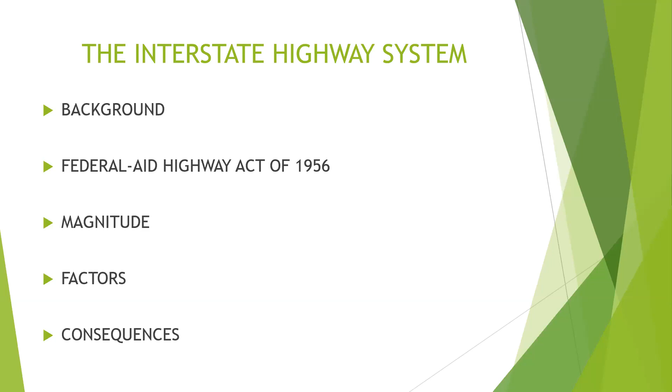Given the explosive demand for automobiles in suburban housing after the war and concern about national security, President Dwight Eisenhower recognized the need for higher volume transportation options. So his administration formulated and implemented the Federal Aid Highway Act of 1956. This was the largest public works program in US history, authorizing construction of 41,000 miles of interstate highways spanning the nation, with $25 billion authorized to cover 90% of the cost. States and local organizations only needed to contribute 10%.

During the initial construction period, more than 475,000 families, over 1 million people, were displaced from their homes, their property seized by eminent domain. The vast majority affected were low-income people of color in urban core areas. So where you saw those red sections on the Oakland map and other city maps, invariably that was the path taken for construction of the interstate highway system.

In addition to furthering the goals of Jim Crow segregation legislation in certain areas, decisions on siting interstate highways through urban areas were influenced by the desire to clear out slums and open up vast tracts of land for other purposes. This was at the same time as the Poplar Street Project A I mentioned in Wilmington, which leveled blocks of homes in the community of color there.

But in many instances, in reality, these slums were actually lower middle or middle class communities, identified as slums strictly because of the complexion of the residents. In addition, the timing coincided with what was later proven to be faulty thinking about urban renewal, which came to be colloquially referred to as Negro removal.

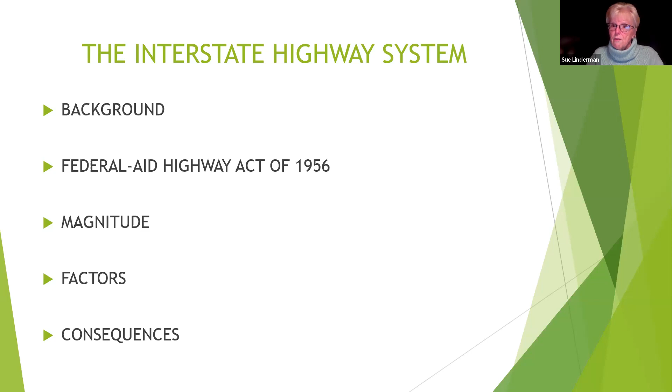What is happening in Wilmington in terms of discussing possibilities of rectifying the damage? These conversations are being held in other cities as well, and I suspect Dave will talk a little bit about that. But the question for us, specifically here in Wilmington, is what is our hope for the future? So Dave, let me turn it over to you.

Okay, first I had to put on headphones. There was a little bit of noise there. Can everybody hear me okay? Yes, okay great.

All right, let me share my screen and get this presentation underway. For Wilmington, we will talk a little bit about the history, what was lost as I-95 went through, but really the focus of our presentation - and this is very similar to what we used for our public workshop held on November 17th - really the goal is more to think about the future.

So your segue with your last slide, Sue, was very good because it kind of showed what we are doing to try to make things better in those neighborhoods. But I'll get started, and basically I'll walk you through the site history and what was taken.

We're going to look at some other projects. As Sue mentioned, there are cities around the country that are replacing their highways or building over their highways, lots of different ways to do it. So we'll look at some of those, and then we'll talk about our approach and some of our analysis, and the scope and timeline of the presentation.

And I would like to have a discussion and give everyone a chance to comment on whatever strikes you as we go through the process. So we do have an advisory committee, made up of roughly 35 people. What we tried to do - we knew we needed the elected officials to be involved in the process, we definitely needed the state officials and elected officials as well, but we also really wanted to make sure we hit the neighborhoods around the area.

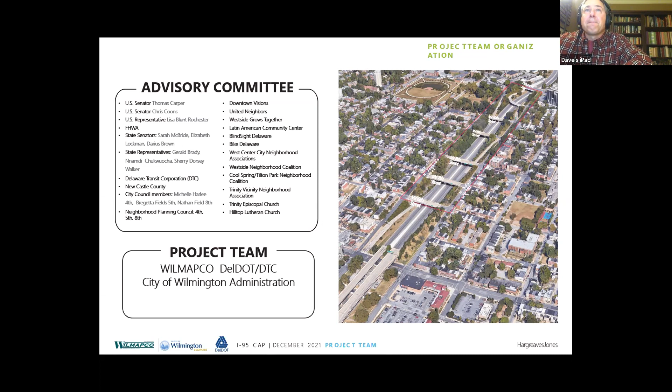And we have a project team that we brought in - they have a New York office, they have a San Francisco office. It's Hargreaves Jones. They are the prime consultant for us, and they're actually a landscape architecture firm. They paired with JMT, which is an engineering firm. So the idea is to have a firm that knows what these new spaces, these reclaimed spaces, look like as parts of other projects. And the engineering firm is the firm that actually will make sure that whatever we build is feasible and will have full support of a structural nature so that everything we want to do, we can do.

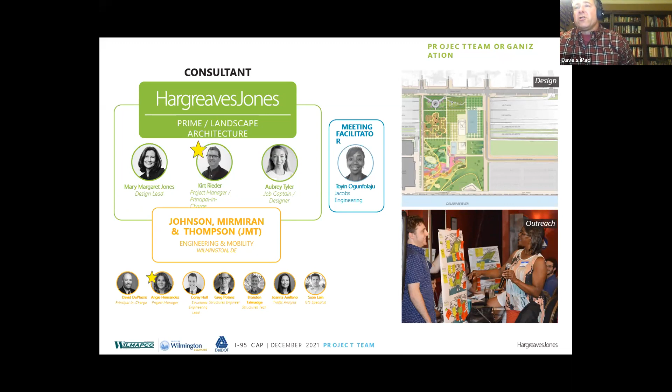We also brought in a facilitator working with DelDOT from Jacobs Engineering. Her name is Toyin, and she'll also be working with us as we go through this process, helping us with public outreach.

These are a few precedent images just up I-95, in Philadelphia. Penn's Landing is looking at an expansive cap that's 12 acres. It will go from Front Street all the way to the river. There are some very challenging engineering pieces to that project. We'll talk a little bit about it further on. And Hargreaves Jones actually is part of this - they helped design the cap for Penn's Landing. That project is actually getting close to construction, so that's one of the projects that's actually moving forward.

You can see on the screen a similar type of park that was done in Moscow. I have the name of that park because my Russian's not as good as some people's - it's Zaryadye Park. So it's a similar situation. Hargreaves also worked on that one and worked in London on the Queen Elizabeth Olympic Park, which has a similar nature in terms of how it was reclaimed land. So those are things that we wanted - it was important to us to have a firm that's done this work before. We haven't, and we want to make sure that we have not just the local perspective, but that national perspective and national teams that have done the work in other places and had success.

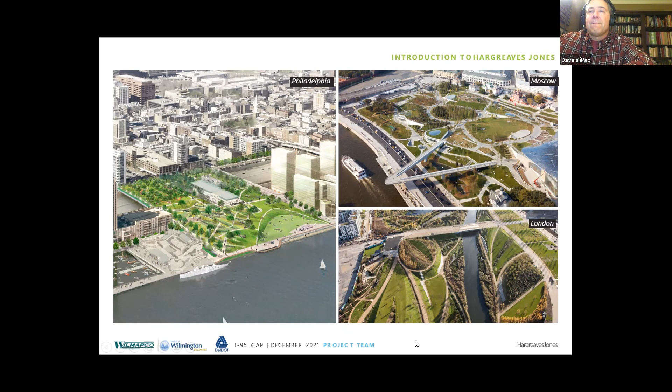So, tell me I'm not frozen. I was frozen. All right, hopefully we're back. Okay, great. I didn't miss anything, did I? Let's make sure. All right, we're good.

Okay, so for context, as I pointed out, we wanted to reach out to the neighborhoods that are directly around the I-95 project, and you can see it outlined here in red. So we have representation from Cool Spring, Trinity vicinity, the West Center City, Quaker Hill. We have actually worked with Hilltop Lutheran Church, and we've been working with Westside Grows from West Hill. So we've reached out and gotten as many folks as we can involved, because it's not just the neighboring communities, but the communities all around that we want to make sure have input on the process.

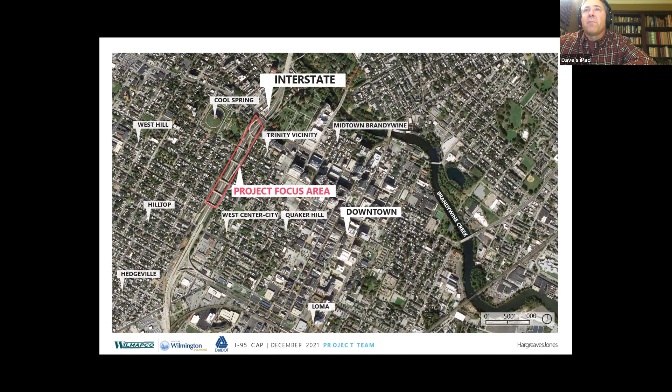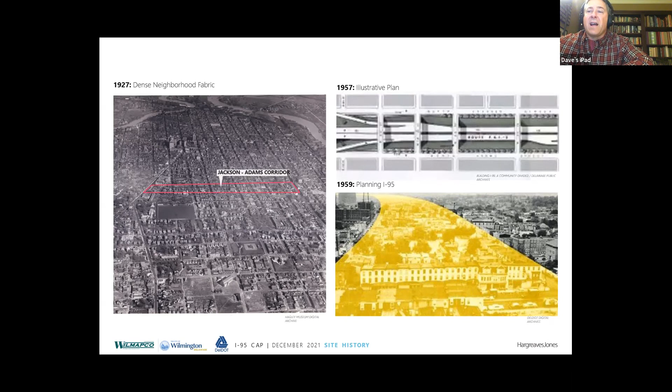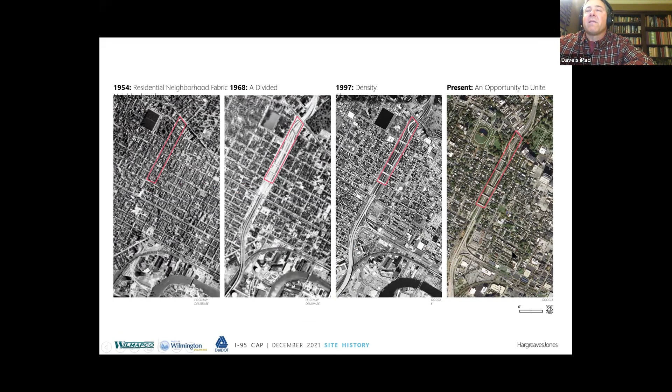This shows you all the structures that were there, and this shows you further in the destruction in '68 and how the density grew around it as we've moved forward. So we're hoping to see that those really dense neighborhoods that don't have a lot of green, maybe this is the chance to get them something that fills in those gaps for them.

Here's where we talk about some other areas where things were done. We haven't necessarily said this has got to be a park. We really want the community to determine what goes in this space and how much of the space could actually be capped. When you talk about a cap, you're basically talking about the space between these streets that would just be a much larger bridge that could support whatever is needed, or whatever we choose as we move forward.

Now you do have a couple of sections where there are ramps that make things challenging, but the key is we want to look at this, and the community is going to have the final say on what happens through that advisory committee. It's kind of rare - you don't always see that kind of power given to an advisory committee, but DelDOT's point and the state's point was really that the impact is going to be felt in a positive way. The impact will be felt by this community, and they should have every chance to be the determining factor on what actually could be built.

So we haven't said park, we're not determining what it is. We know there might be some limitations with what uses could go in there because you're over a federal highway, so you can't necessarily have a for-profit developer building market-rate housing above it. I don't know if you could do some kind of subsidized housing - we haven't gotten to that point yet to look at it. We do know that in Philadelphia at Penn's Landing, there was a lot of documentation necessary to get a nonprofit cafe and an ice skating rink built as part of their cap. So we know there are things that can be done, but we really don't want to influence yet what the community chooses to see here as a use.

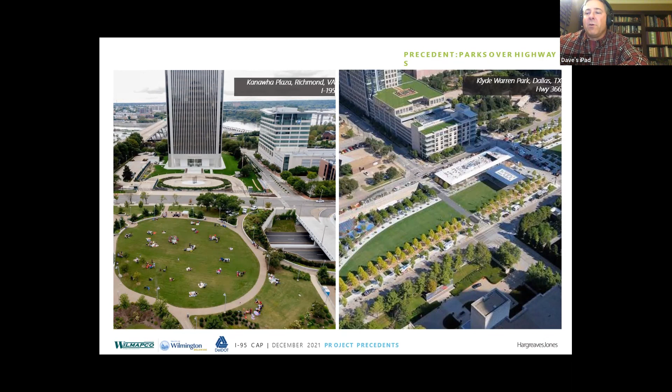There's a Southern Gateway Park in Dallas, Texas, on some reclaimed land. And then there's the Big Dig in Boston, which I don't necessarily want to model after, because there's a lot of complications with that project. But the final product is, I think, a mile and a half or more of green space that was added as they basically built a full tunnel. Now we may not be looking at a tunnel, and that has a lot of different complications versus a shorter, couple-block cap. So we're keeping our options open, but we're looking at other projects so we can anticipate what the challenges might be.

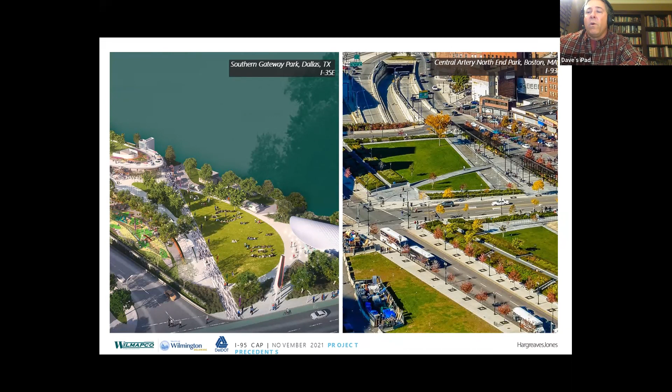Here's another look at Penn's Landing. As I said, Hargreaves and Jones helped design this project. This is a 12-acre cap. You can see there's an ice skating rink set up here, a couple of small one-story structures, cafe, restaurant style. And once you get back over land, there's some other things they'll do. But there's a lot of program space - areas for walking, areas for sitting and contemplating, some playground spaces.

One of the things we wanted to point out is when they were designing this, they knew that you're going to have a deck and I-beams that have to span the area. But between those I-beams, you could actually create a deck that provides more space for trees, because you can't necessarily pile four feet of dirt over the deck you want to build, because it changes the complete topography of the area.

So you might be able to engineer it so you'd have these deeper trenches where trees could root, as opposed to thinner areas where you could have grass and shrubbery. It gives you an idea of the complexity necessary to make sure the engineering structure supports whatever the use is above it. But it also shows there's some flexibility to that.

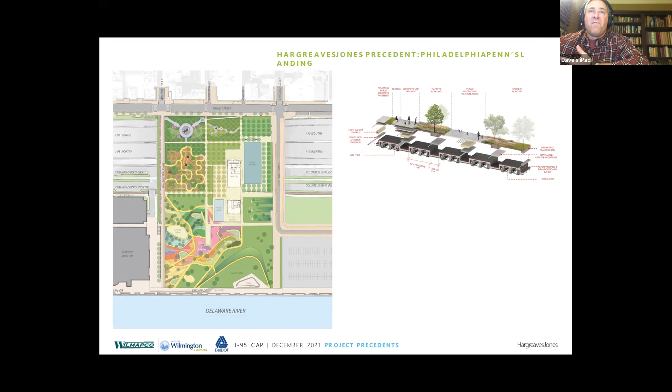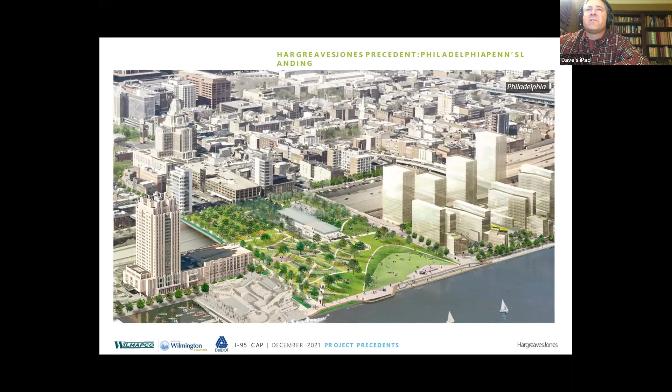And that's one of our goals, to maintain flexibility as we go through this process of listening to the community. So that's another look at what they're going to have as they finish their work. Again, this was Hargreaves and Jones that helped design this, and construction should be starting in the next six months, I believe.

So here's how we're going to handle things as we go forward. We see this as an opportunity. The reason we titled this project Bridging I-95, Reconnecting the Community, is because we don't want to reconnect communities - this is one community, and it was at one point. So the goal is to reconnect it and create as many connections as part of this process.

Again, it's not just what's over I-95, but you also have Jackson and Adams streets, which have become very busy streets that supply more space for cars getting to and from I-95. And while we're not able to alter the way I-95 runs through Wilmington, we can certainly alter the way those streets function and make them more neighborhood friendly, help slow traffic on them, and make them easier for pedestrians to cross. Because what would be a waste is to build a very nice public space over I-95 that people can't really get to comfortably, just walking or riding a bike.

And so the goal is that reconnection means you have to focus on not just the structure and what you want to build, but how you want to be able to get people to it easily and make it part of the community, not just another barrier or a continuation of the existing barriers.

So this is a collaboration, really building on the efforts of local groups. If you've been out there, you've seen those three bridges that have been painted. That's a grassroots effort led by United Neighbors in partnership with Westside Grows to try to beautify the community with what's already there. And we want to make sure we harness that, not just the energy, but the same folks who are involved. You don't want to replace those folks and bring in other people to try to tell them what to do.

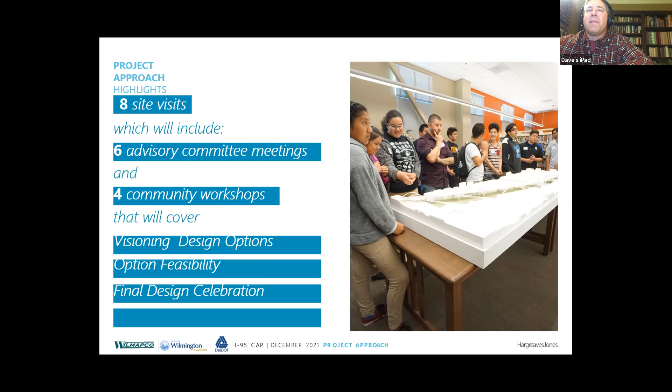The idea of saying 'I-95 cap structure' just doesn't inspire any real vision. It's just the structural piece, which is very important, but the idea is really to develop what's going to happen over top of that. There are a couple of key points: I-95 is not going to be rerouted as has happened in some other cities, and we're not going to be closing any portions of it.

The I-95 rehab project has been underway for the last year, and one ramp interchange was reconfigured. There are potentially a few minor changes we can make, and we'll make sure that all the ramps currently here have to be here. But as far as the route is concerned, it's going to remain an interstate highway through the city of Wilmington.

The other promise we're making is that we are not looking at private property. We aren't going to displace residents. We're trying to make our impacts positive and minimal. So while our project boundary is really the outside curbs of Adams Street and Jackson Street, the bridge at Delaware Avenue and the bridge at 6th Street, we may be able to carry some positive elements like streetscapes into the community, but the goal is not to touch any private property.

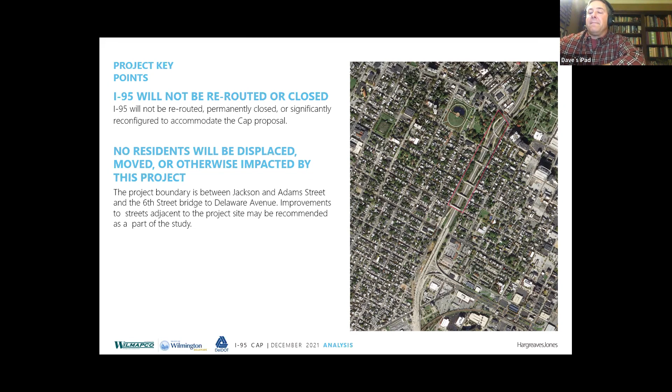We've done some preliminary mapping of the study area, and it's a 2,500 foot span if we were to cap the entire study area, going from 6th Street to Delaware Avenue. That may or may not be possible.

You have this ramp that comes up off I-95 and goes to 11th Street. You'd have to make allowances for that if you were putting a cap in this area. There's also the ramp that begins around 4th Street and comes up to 8th Street, and then there's another on-ramp that starts at 9th Street and goes down. So we do have to be aware of what's out there.

As I said, we aren't necessarily going to be able to close ramps or move those, especially as the state is currently spending a very large sum of money and two years of work to try to reconfigure and rehabilitate all of that infrastructure.

So there is a total of 12 acres over this entire study area, and it's 300 feet wide. That gives you an idea of what could be reimagined in these spaces.

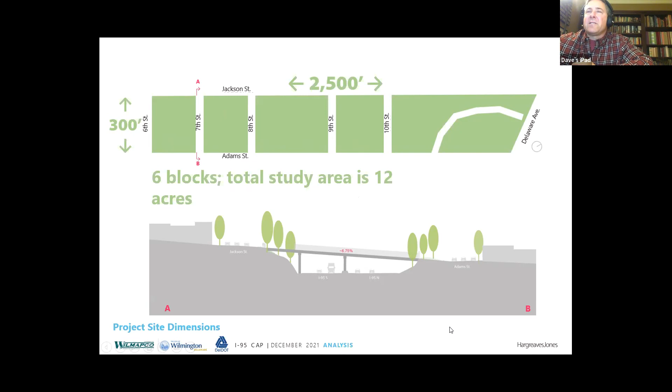There is a grade of 6.75% here at 7th Street. And then on the next slide, it shows slightly less of a grade change, from Jackson to Adams. At 10th Street, it's hard to read, but it's 3.65. So there's a little topography. This is looking south to north, again Jackson here, Adams here. It does slope a little bit.

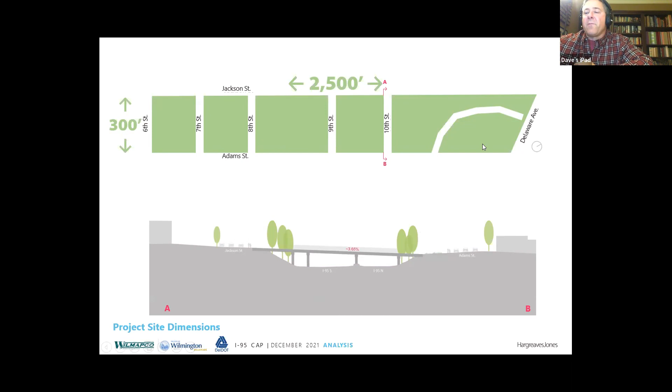That could actually be a positive because it would give you a view shed from one side of this project looking towards downtown. So it's just another piece of the geography that we need to keep track of.

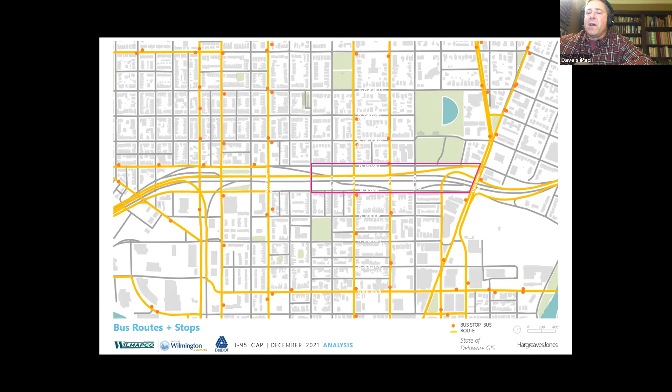This slide basically shows all the bus routes that operate in and around the area. We certainly don't want to impede bus movement and bus service. In fact, if this is really a community park, bus service could be a great way to get people to and from the park. So we will absolutely be looking at how transit can be incorporated into whatever is built here.

Another thing we want to incorporate is the Wilmington bike plan that was just adopted back in 2020. It shows the best proposed bike routes through the area in green, on the surface streets we're dealing with. If you're aware of the traffic at Delaware Avenue, it's a really challenging place to try to ride a bike.

4th Street is similar. Now 4th Street has some work underway that's going to make the section from I-95 to King a little more bike friendly, but even I've done some studies of Delaware Avenue to 12th Street, and there are real challenges if you're trying to ride a bike there. So there's still a lot of work that would have to be done.

Key piece being, these streets here are lower volume, lower speeds, and much more suited for bike movements. So you'd like to have that connectivity with the bike plan.

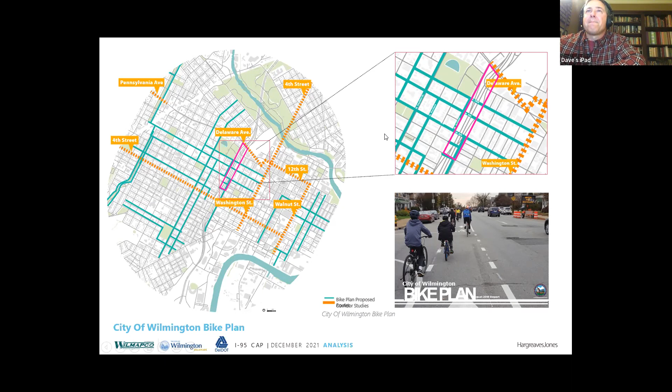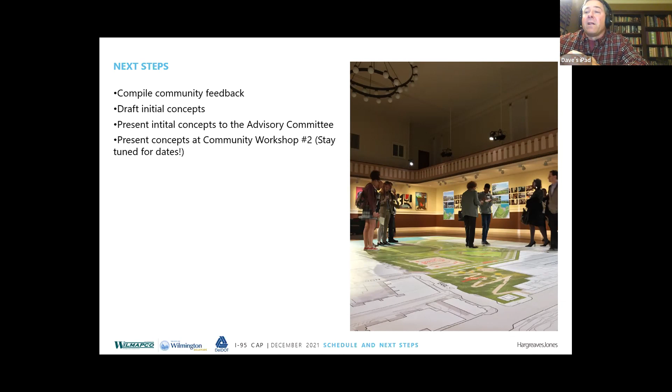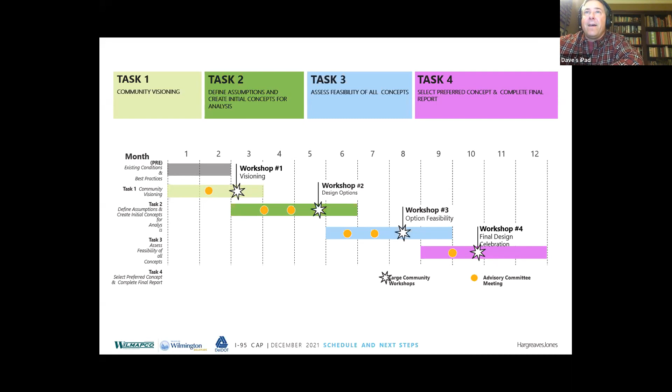It's pretty simple if you know WILMAPCO.org slash I-95 cap. There's some history of I-95, the history of this project, how we got started, and really the updates. Every time we complete a workshop, the presentation goes up there along with a recording of the workshop.

We know there's a Hispanic population that's sort of in this side of the project and further south, so we also recorded the workshop in Spanish, so folks could click on that link if they needed that translation.

Again, the goal is to try to get as much interaction. I think at the moment there's still a survey up there, similar to the questions I showed you from the advisory committee. So that's another place where if you send that link to friends and neighbors, people you think are interested in the project, they can go through the survey and give us their feedback, which can be added to the vision.

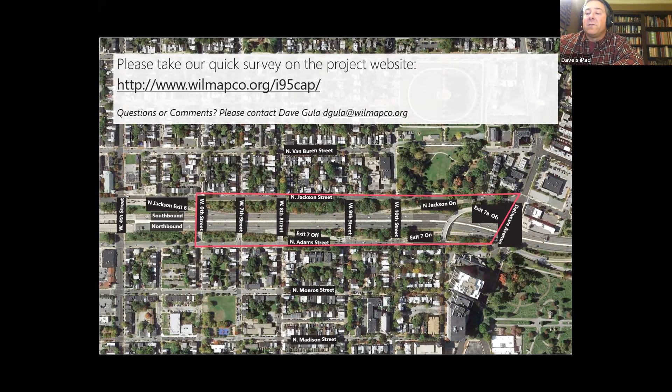What I'd like to do is open it up to some conversation. I'll go back to the questions we asked, so you have a bit of the same structure we used for our workshops: what would be a successful result, and what are the things this group thinks would be important to see in the final project?

You don't have to be shy, because I've even been yelled at, so it wouldn't be the first time. All right, we'll start. People can use the raise hand button if they want.

Let's see, Dave, do you want to leave that screen up? Well, I'll flip through the other two, because I just want to get some feedback. So the first question is, what would make the project successful? And it doesn't have to just be one word.

Other things would be: where are we trying to connect? What are the areas that people would want to see that were easier to get to, or just have a flow? One of the things I neglected to mention is early in this process, a University of Delaware professor of landscape architecture...

...had a bunch of students, juniors and seniors, and she said, can I hitch a ride on your project? So next week we're actually going to have the final presentation of their work. They came to the first advisory committee and took this same basic area and created some of their own ideas.

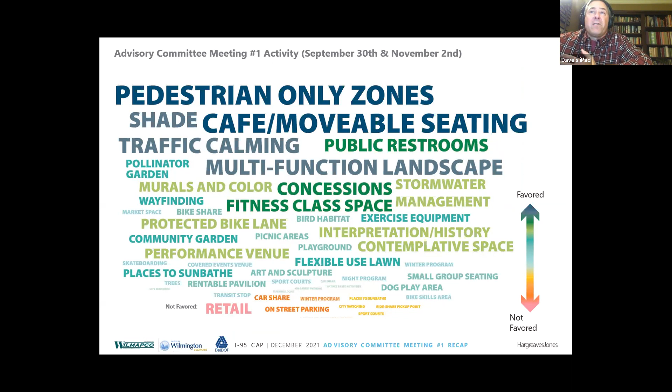...what kind of amenities do you think would be very important for this neighborhood, for this community, for this area of the city? So I'll go back to the map because I think the map is helpful.

Okay, well, we'll start. I've seen two hands. I saw Roger's first and then Moira. So Roger, go ahead.

Thanks, Dave. Got a stack of questions. Let's start with one about home values in the area after the project, and also who rents there and who owns there, and who's being consulted in your groups—is it the homeowners, or the renters, or the people that own the homes if it's a rental unit?

Okay, I know that on this side of I-95, there's a lot higher percentage of rental—could be anywhere from 70 to 80%, depending on which block you're on. I think further up here it's more ownership. On this side of the block, I don't have the numbers as specific, but I know it's a substantially lower rental population there.

On the one hand, one of the things that concerns us is we don't want to necessarily build this wonderful amenity and then suddenly see all these properties get sold and a big developer comes in and builds right here, and the folks who've been living in this area for a really long time with no amenities suddenly priced out of the equation.

I have spoken to one of the city council members for this area, very detailed conversations. Her concerns are the same thing—the term people use is gentrification. One way to avoid that is to put together, as part of the process, a community benefit agreement. One of her requests was, is there a way we could find funding for folks who wanted to improve the facade of their houses, as a very low interest loan perhaps.

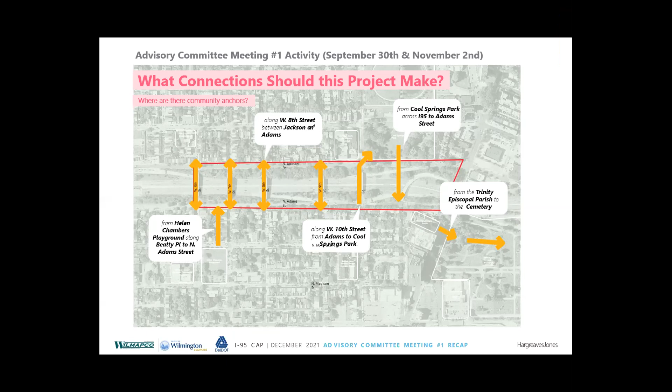One of the keys, and I didn't mention this yet, is you have to have maintenance. You can't just build something and then walk away from it. We've all seen that happen. I think this might be too big for the city to suddenly have to say, okay, our Parks and Rec now has to be part of this. I certainly think they need to be part of it, but I also think the state and DNREC might have to be part of this too, to make sure that whatever's built, not only do you have programmable space, you've got to make sure someone's controlling that program.

Who do people contact when they want to use that pavilion, or if they want to set up a community event? So you've got to have some kind of a group. In other cities this has been done through nonprofits set up to handle this. There are consortiums that do it. You'd also like to have maybe some private interest in that, because then you could perhaps get some private sponsorship of some of the spaces. So the idea really is to try to make this a partnership, because that's how it'll work best. And really that ongoing maintenance piece is just as important as the actual construction.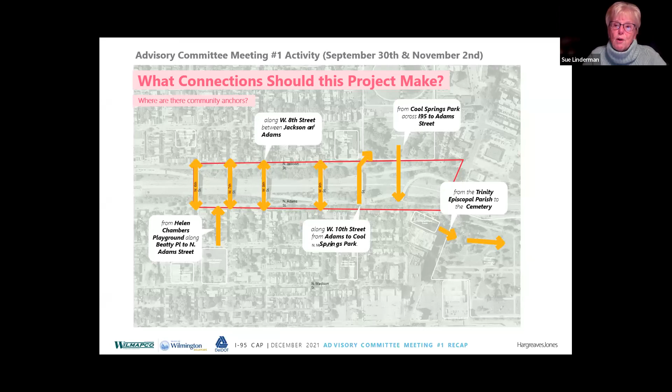Perhaps there is some financial instrument that could be made available to people living in these communities who don't have the wherewithal to buy their homes or improve them. There might be a separate source of funding to help with that aspect of the stability of residents in the neighborhood. I think Delaware Housing Authority would be among the people that understand the process for that. There's another group I'm not remembering that deals with energy—I apologize for not having it at the tip of my tongue, but I'll get it to you, Sue—because they deal with the structure of housing vis-a-vis weatherization, insulation, and people being able to save money. And they do solar with 0% and no money down. So it might be helpful.

Great, I'll pass it along. I want to add my thanks to everybody else's to Dave. Dave, this was a really great presentation.

I remember when I first heard about this as an issue, that some cities and states were actually tearing up interstates, removing them. And when I first heard about it, I thought, what if I-495, or whatever that road around Wilmington, became I-95? Well, it was too late because we were already putting millions of dollars into fixing up I-95. It was sort of like, oh, I could have had a V8, you know. But this idea, I think, is wonderful. Certainly engaging the community the way you are and having the support from the top down, I think it's brilliant, and I can't wait to see the progress and the results.